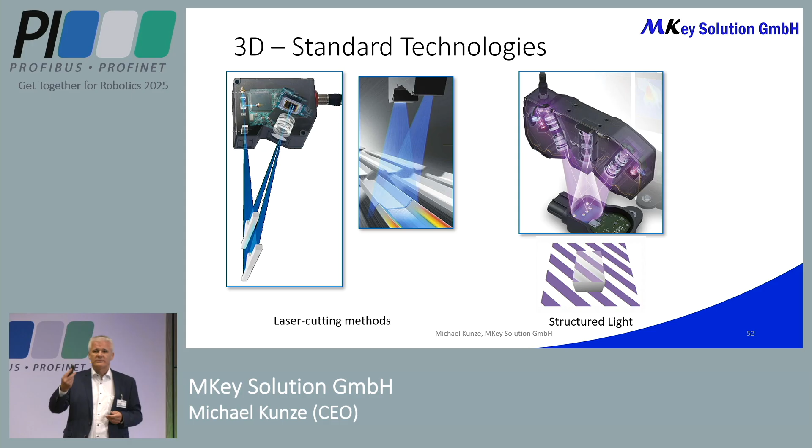But the presenter doesn't work. Can you activate? Ah, there, thank you. I hope so. Then we must go one step together. Okay, let me go back. Yes, in practice you see this one here. It's moving up. And how can I start this? Normally it should start by itself, but it doesn't start here, correct? I hope that we can. I will wait. Okay. Now I hope it starts by itself, but it doesn't work here.

Now you can see this laser line is running over the workpieces, and step by step you get the profile, and then you can calculate the 3D images of the workpiece here. Then with the structured light, you have many images, and with all of these images you can calculate the 3D. These are the typical techniques. You know this is on the market.

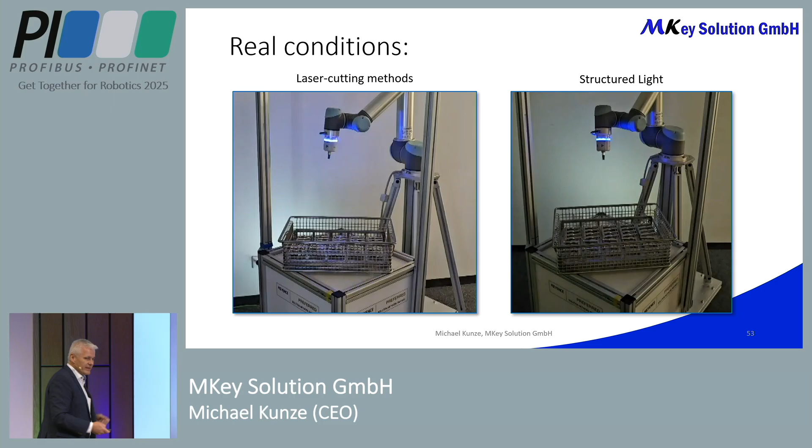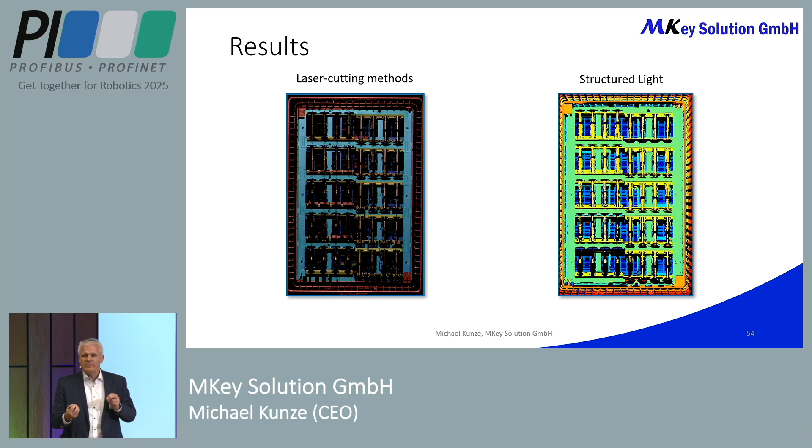But what is the result with these shiny surfaces? With the shiny surfaces, you see here, you have no information, or no stable information, about the surface of your workpiece. Or with the structured light, also here the information is missing. It's not a stable result. Because you have many reflections of your light, the camera has no information where the light comes from. What can we do? I will go to the next.

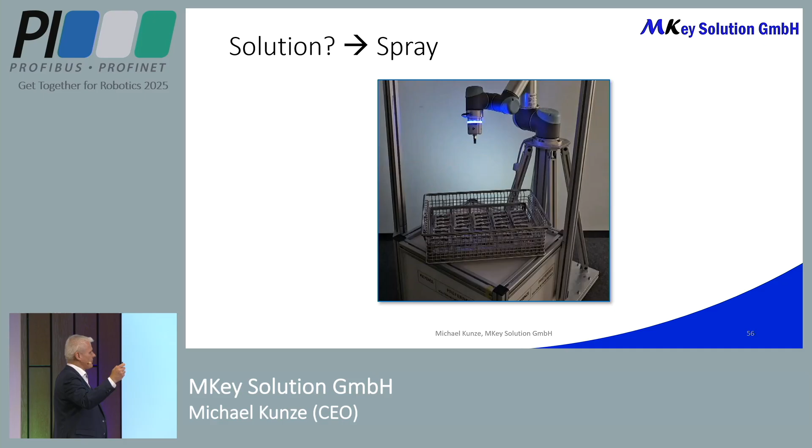What can we do? We can use a spray. Nobody knows this one, but at the fairs we use this spray. You bring a small cover on the surface, 2 or 3 or 5 micrometers, and with this cover you can drastically improve the reflection of the surface. Okay, now you can see here. This is before, and this is after using this spray.

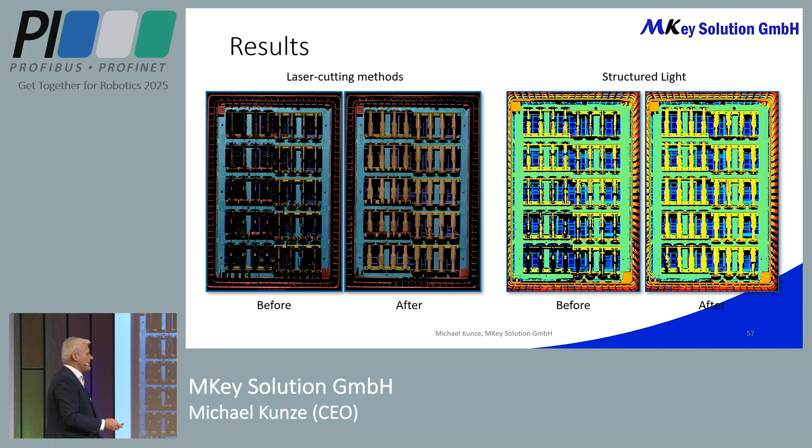Same with the structured light. This spray can improve drastically, but it isn't realistic. In the production line, you cannot use such a spray because you have additional material, you change the surface, you cannot weld anymore or mount it, and therefore it's not a realistic solution. What can we do? We use the new technology, the light field technology.

What is light field technology? The light beam comes from any point, and you can get the coordinates x, y, z of this point, but interesting is: what is the direction of the light? You can use 2 planes. With one plane you get the information where the beam comes from, and with the second plane you have the information what the direction of the light beam is. But in practice, can we do this?

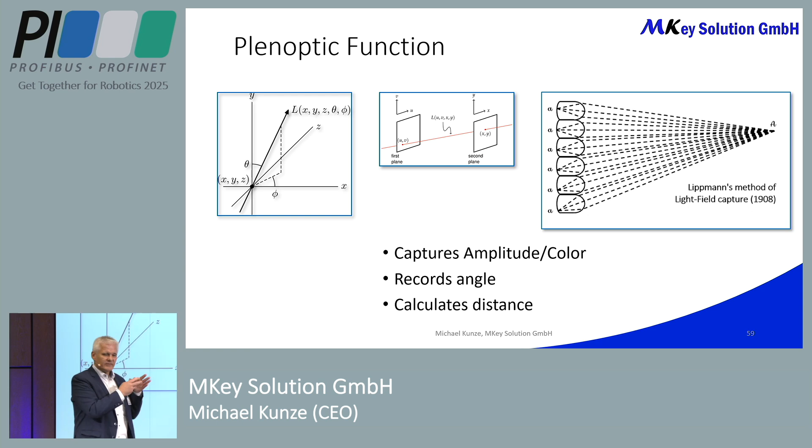You see here on the right side, we use many cameras side by side. And then you have 2 planes. The first plane is the pupil of the eyes, and the second plane is the image of the camera itself. We have many eyes side by side, and all together is one camera. The light field technology can calculate this direction, and even on highly reflective surfaces we get good information about this object.

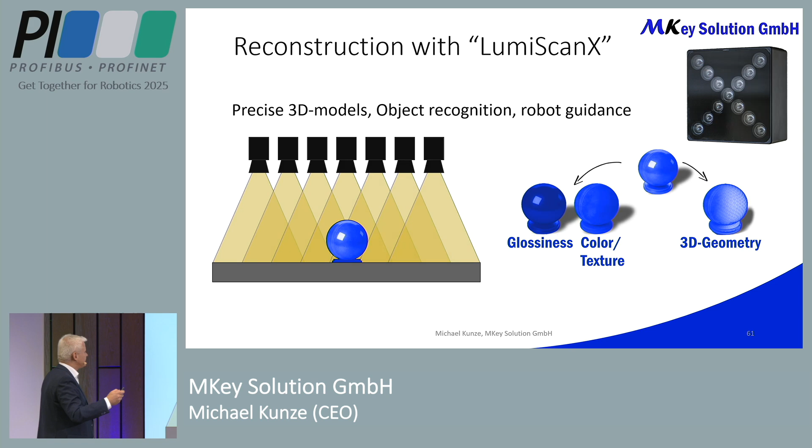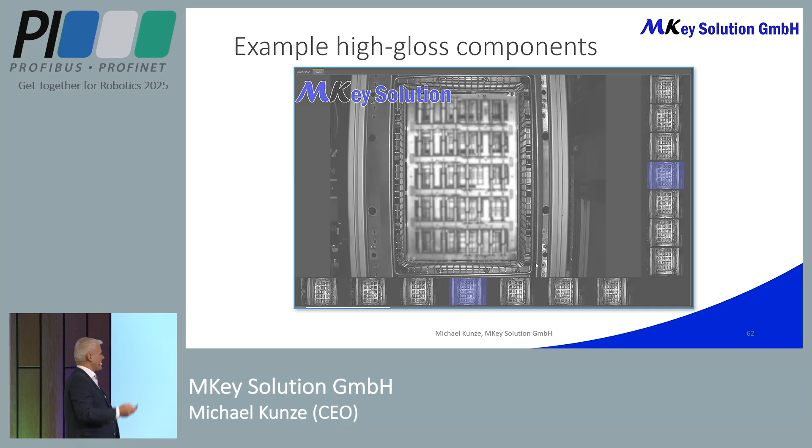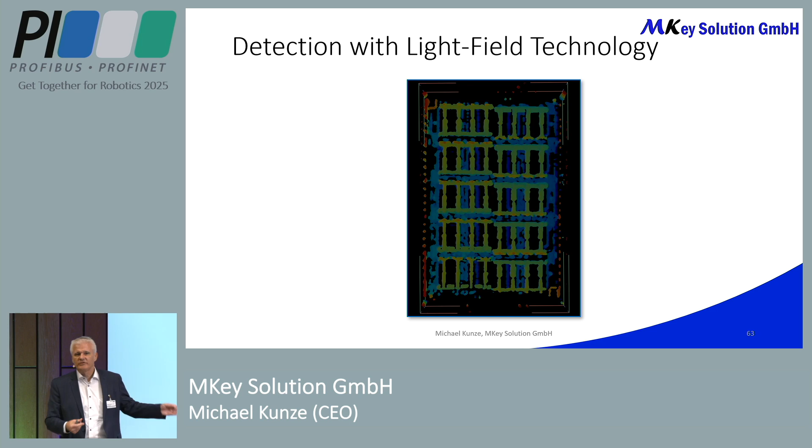But what is the result? You can see here the result. For each workpiece, we get stable 3D information with this highly shiny surface.

This is one good point of the light field technologies: we have robust solutions for shiny, oily, and other reflective surfaces.

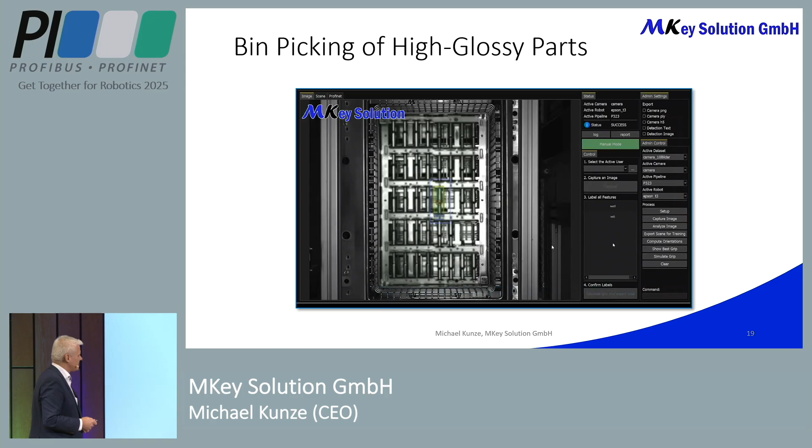Let's go to the practice, the use cases. This is a typical situation: we have this information here, this point. We make a picture, we analyze this picture in 2D to reduce the regions, then in the region we found interesting objects, we go to the 3D point cloud. In the point cloud, we match to the CAD model, for example. Then with these coordinates, we give it to the robot. This is a simulation here, but of course it also works on a real robot, which you see here. The robot now gets the position, he can grip this workpiece and bring it out.

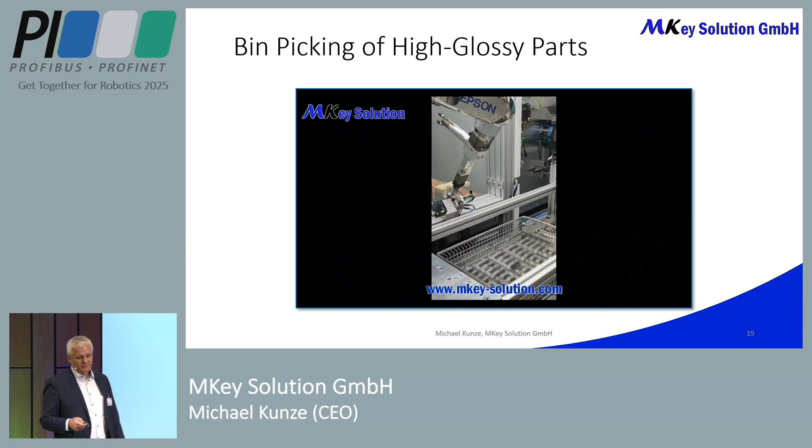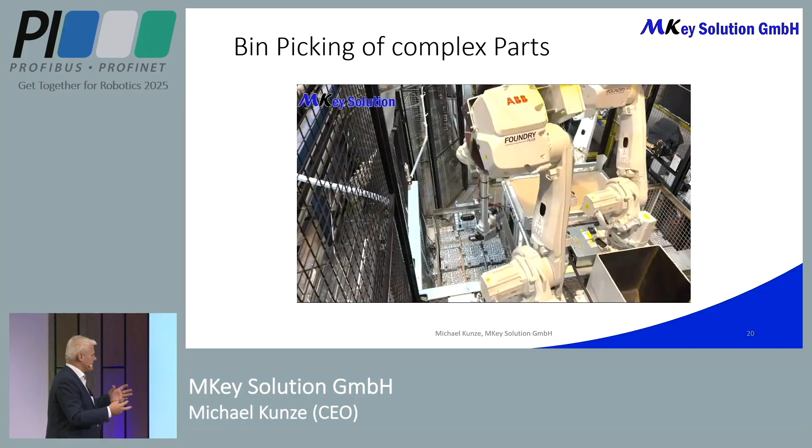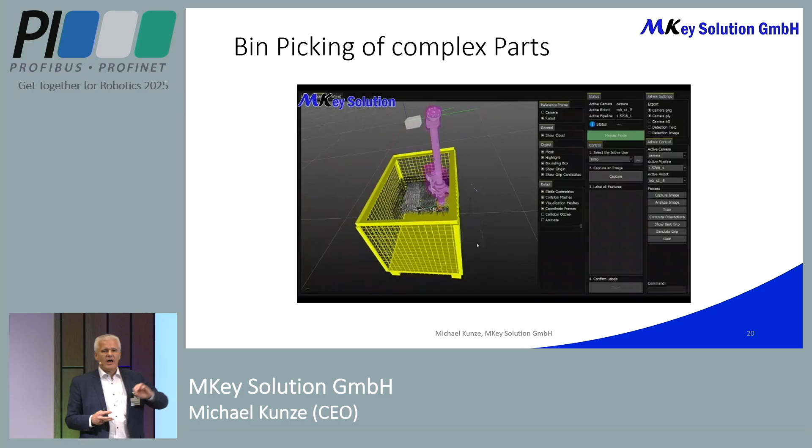The second example, you see here, it's typically an aluminum cast part or any other metal with very difficult surfaces, and we go through the same situation. We detect objects in 2D and 3D, and in 3D we can match to a CAD model. With this information we can also check for collisions and what's on the outside, and give the robot a path, so it knows how to pick this part from the bin.

The light field technologies give us high accuracy and small occlusion, also for difficult surfaces. As we've seen, it's one picture - all eyes make the picture at the same time, so it's also good for objects in movement. With structured light, using many pictures, you must stop the object, or with laser scanning technologies you need movement but the orientation must stay the same. This is a big advantage for light field technologies.

Then we have many possible applications here: object detection, localization, and also others like bin picking, quality inspection, and object measurement.

The light field technologies bring improvement, and this is small but a main point for your robot application: the robot must know where the workpieces are and how to pick them, and therefore light field technologies give us a big advantage.